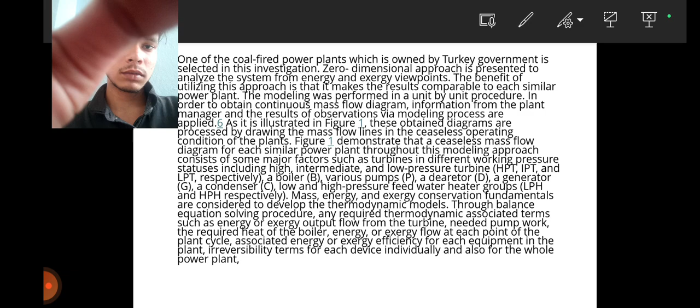Today I'm here to explain about the thermodynamic and economic analysis of performance evaluation of all the thermal power plants.

Increasing energy use is inevitable in developing countries and is necessary to achieve a higher quality of living. Various parameters cause energy use growth, including industrialization, urbanization, and surging population. Different aspects of life depend on energy, such as agriculture, industry, transport, etc. Approximately 80% of power generation in the world is provided by fossil fuels, and the remaining part works with other types of energy sources, such as nuclear energy and renewable energy sources.

Typically, thermal power plants are assessed by applying energetic performance, which is obtained from the first law of thermodynamics. Another criterion for evaluating energy systems is exergetic performance, which is based on the second law of thermodynamics.

Exergetic performance is an appropriate method for design, assessment, and optimizing thermal power plants. Causes and reasons of irreversibility in the system can be distinguished by exergetic analysis, giving better insight into the efficiency of each part of the system.

The mentioned characteristics of exergy performance analysis make it different from energetic performance analysis. Due to this fact, utilizing both energetic and exergetic analysis gives designers significant insight into the system. This type of analysis enables designers to have a more appropriate method to assess and determine steps forward for enhancement.

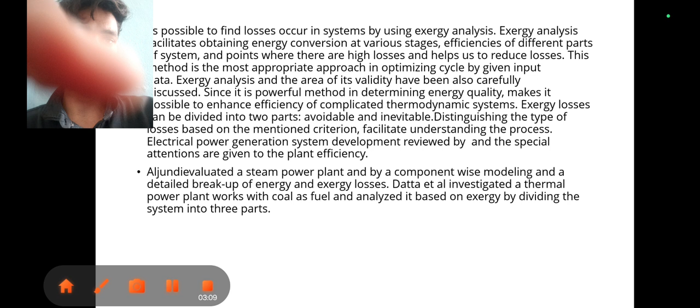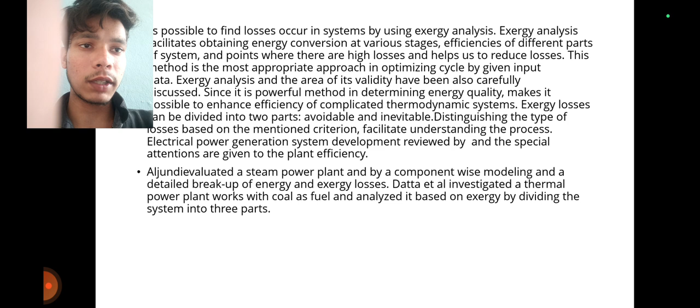A thermal power plant working with coal as fuel was investigated and analyzed based on exergy by dividing the system into three parts. One of the coal-fired power plants, owned by the Turkey government, is selected.

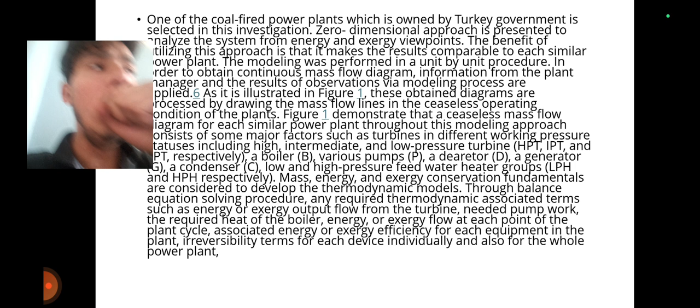In the investigation, a zero-dimensional approach is presented to analyze the system from an energy and exergy perspective, because the benefit of utilizing this approach is that it makes the results comparable to each similar power plant.

Modeling was performed in a unit by unit procedure in order to obtain a continuous mass flow diagram, with information from the plant manager and the results of observations. The modeling process is illustrated as shown in the figure.

These obtained diagrams are processed by drawing the mass flow lines in the ceaseless operating condition of the plants, producing the ceaseless mass flow diagram for each similar power plant.

This modeling approach consists of major factors such as turbines at different working pressures, the LPT, a boiler, various pumps, and a generator, which are considered in developing the thermodynamic models through a balance equation solving procedure.

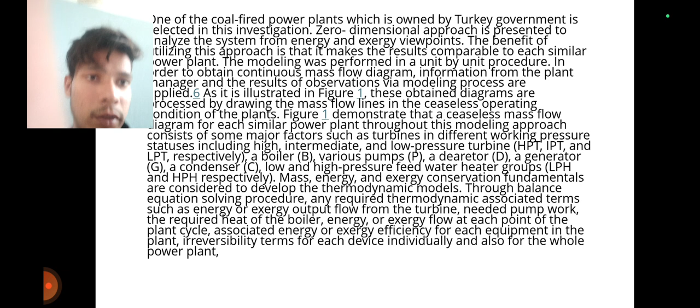Any required thermodynamic associated terms, such as energy or exergy output flow from the turbine, needed pump work, the required heat of the boiler, energy or exergy flow at each point of the plant cycle, associated energy or exergy efficiency for each piece of equipment in the plant, and irreversibility terms for each device individually and for the whole power plant, are determined.

The fundamental thermodynamic theory of energy and exergy modeling is discussed in further sections.

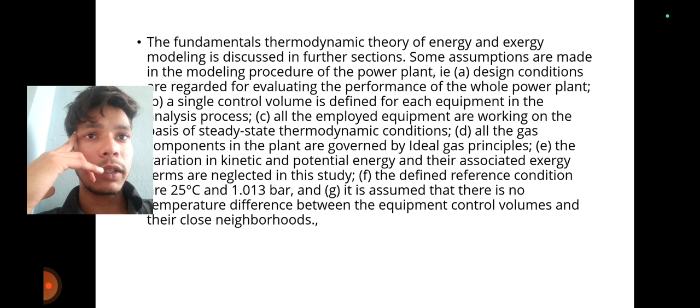Some assumptions are made in the modeling procedure of the power plant. Design conditions are regarded for evaluating the performance of the whole power plant. A single control volume is defined for each equipment in the analysis process. All the employed equipment are working on the basis of steady state thermodynamic conditions. All gas components in the plant are governed by ideal gas principles. The variation in kinetic and potential energy and their associated exergy terms are neglected in this study.

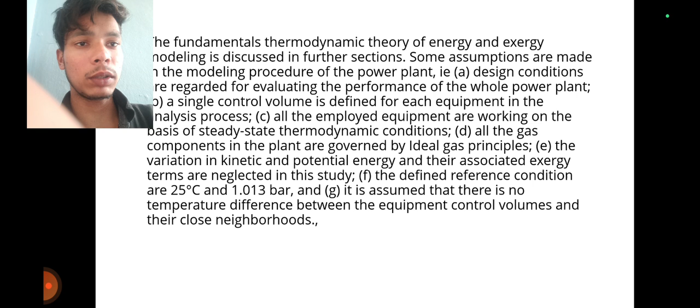The defined reference conditions are 25 degrees centigrade and 1.013 bar, and it is assumed that there is no temperature difference between the equipment control volumes and their close neighbors.

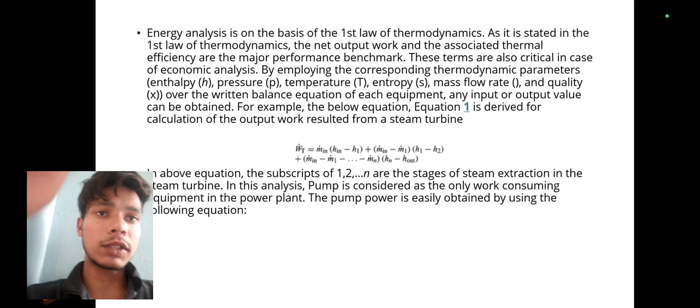Energy analysis is on the basis of the first law of thermodynamics.

As stated in the first law of thermodynamics, the net output work and the associated thermal efficiency are the major performance benchmark. These terms are also critical in case of economic analysis.

By employing the corresponding thermodynamic parameters, enthalpy, pressure, temperature, entropy, mass flow rate, and quality over the written balance equation of each equipment, any input or output value can be obtained.

Pump is considered as the only work-consuming equipment in the power plant. The pump power is easily obtained by using the following equation.

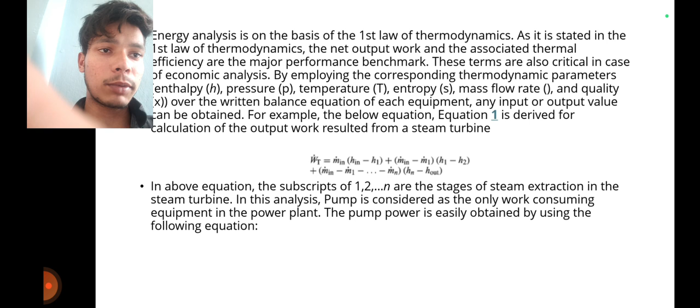WP is equal to M of H out minus H in, divided by ηP, where ηP denotes pump efficiency.

Total useful electric output power of the power plant unit is equal to WT minus the summation of WP.

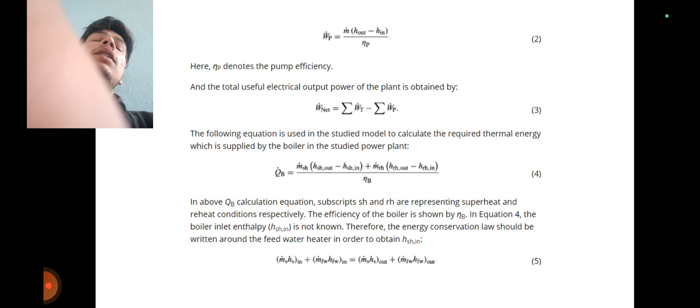The following equation can be stated: Q is equal to MSH of HSH out minus HSH in, plus MRH of HRH out minus HRH in, divided by boiler efficiency ηB.

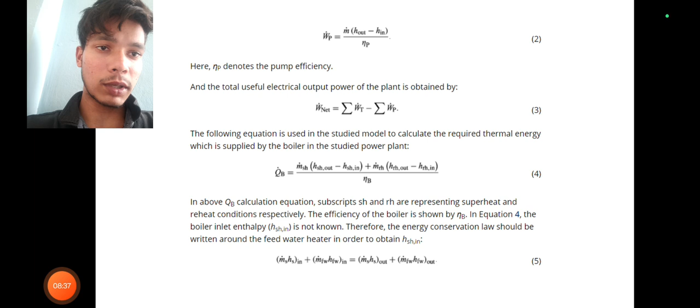It should be highlighted that as the feed water heater's outlet temperature is unknown at the first step, a similar procedure, a mass conservation balance, should be performed to calculate the outlet temperature.

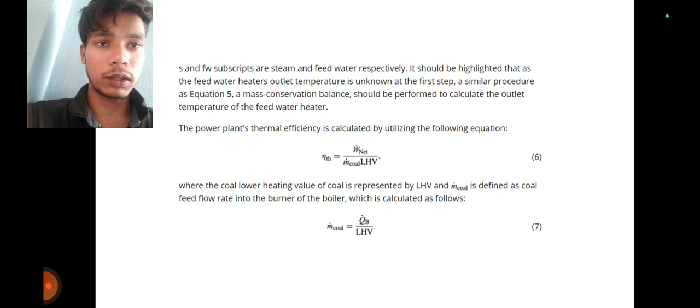ηth is equal to W net by M coal into LHV, where the coal lower heating value is presented by LHV, and m coal is defined as coal feed flow rate into the burner of the boiler, and m coal is equal to QB by LHV.

Exergy analysis modeling is defined on the basis of the second law of thermodynamics. The resulted outcomes from exergy analysis can be utilized to check and also monitor the irreversibility location and propose different methods to lower it to the possible least irreversibility value by improving the system performance.

A high limitation level for an energy flow or source to achieve the highest theoretical work under specified environmental conditions, which is defined by at least two thermodynamic variables, usually temperature and pressure.

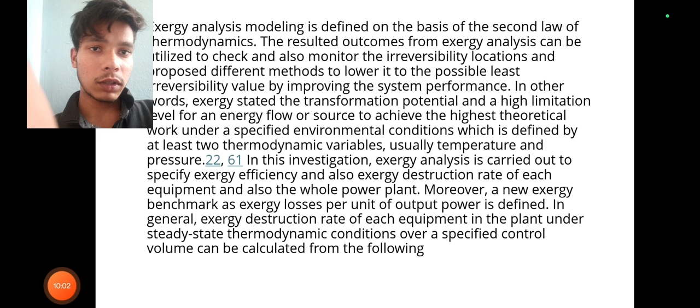In this investigation, exergy analysis is carried out to specify exergy efficiency and also exergy destruction rate of each equipment, and also the whole power plant.

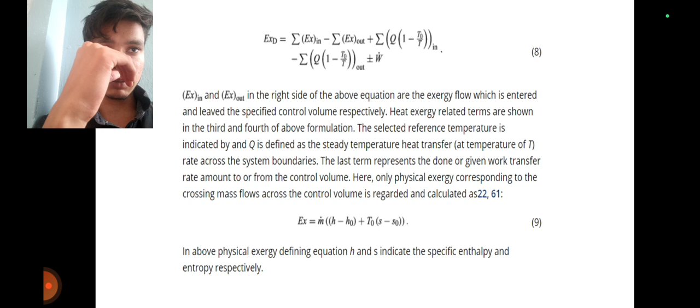Here the equation: X in minus summation of X out, plus summation of Q(1 minus T naught by T) minus summation of Q(1 minus T naught by T) by T of out, plus or minus W.

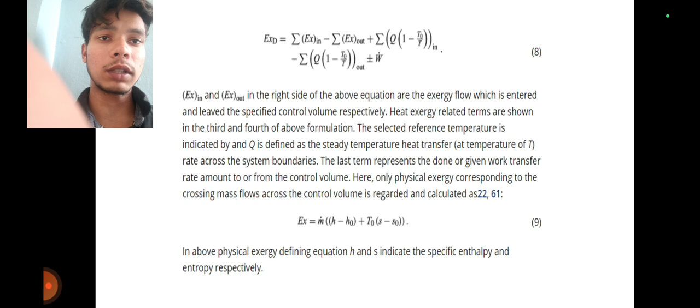Here is the right side of the above equation. Heat exergy related terms are shown in the third and fourth of the above equation. Q is defined as the steady temperature heat transfer. The last term depends on the work done or given.